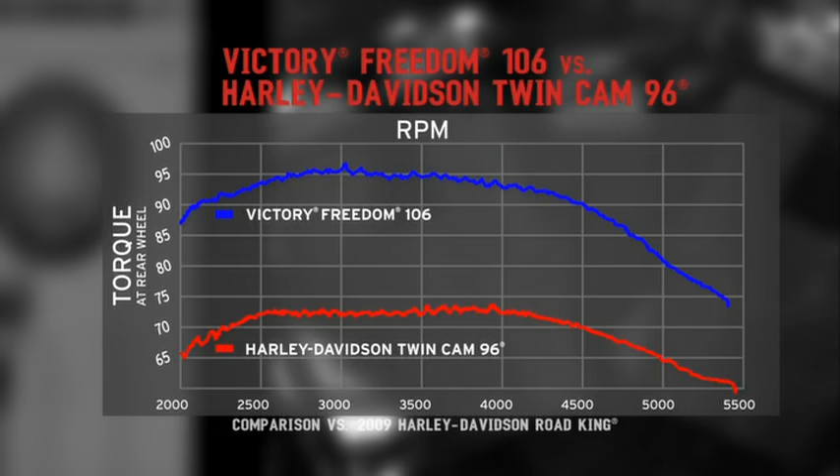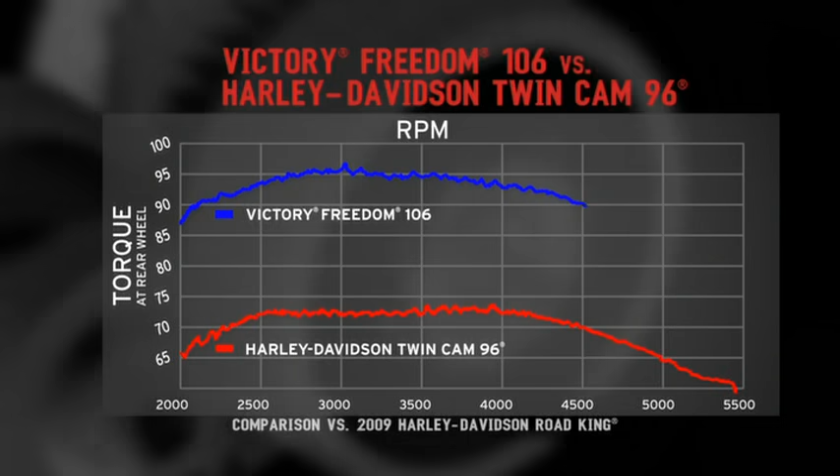These are rear-wheel performance curves recorded on our dyno here in Wyoming. Most large V-twin engines are able to provide high torque just off idle, but the competitor's torque curve dives sharply after that initial peak value, whereas with the Freedom engine, you'll notice it continues strong throughout the mid-range and keeps going into the higher RPM range.

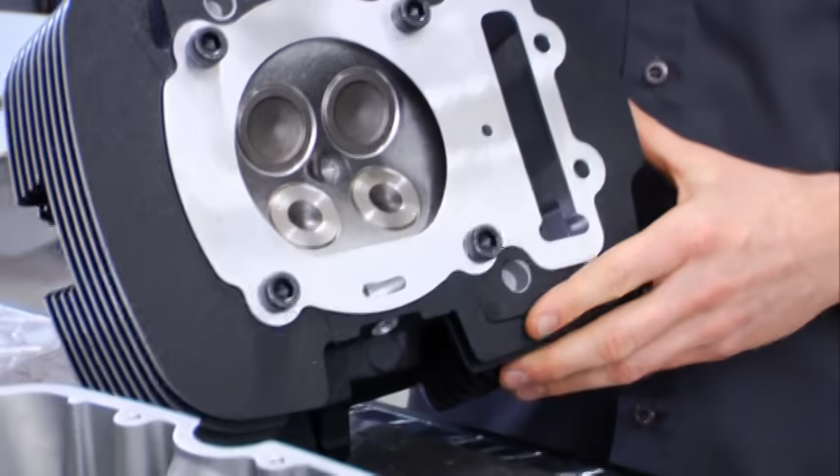To make more power, you've got to pack more air into the cylinder, and the four-valve design helps us do that in a couple of ways. Using two intake valves instead of one, we're better able to package the total valve area required to flow enough air to maintain this torque curve at high RPM.

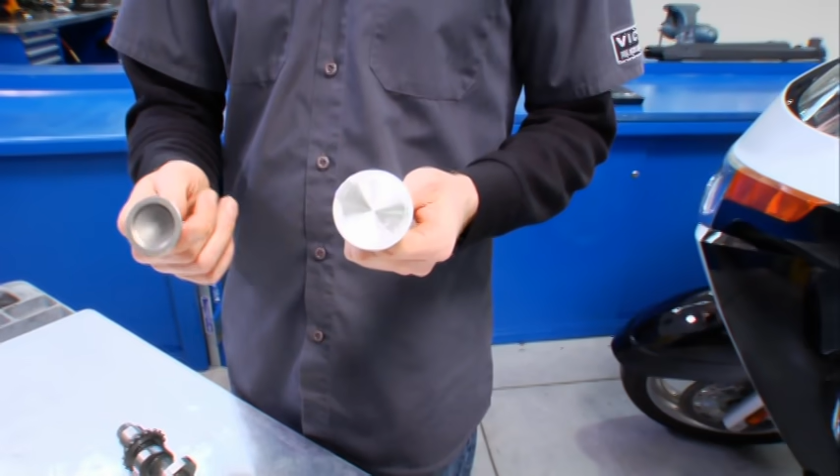To get more air into the engine, it's generally helpful to be able to open and close the valves as fast as possible. That's harder to do with a heavier valve. This is an intake valve from a competitor's two-valve engine design compared to the intake from the V106. You can see it's clearly a lot heavier.

You can see a very heavy multiple coil spring that's required to keep this valve under control, whereas the 106 only requires a single coil spring, much lighter.

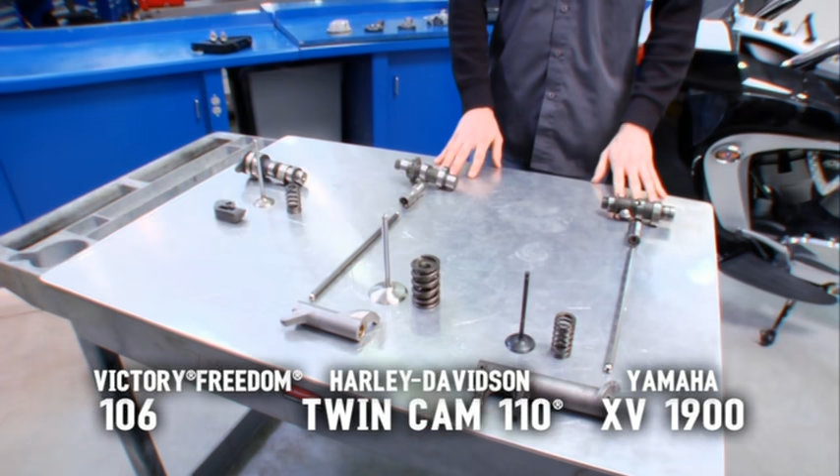Here we have three separate sets of components, two from competitors and one from the V106. You can see these are pushrod style competitors, also large V-twins. In one case, we have not only the heavy intake valve, but the mass of a heavy translating lifter, a pushrod, and a heavy steel rocker arm.

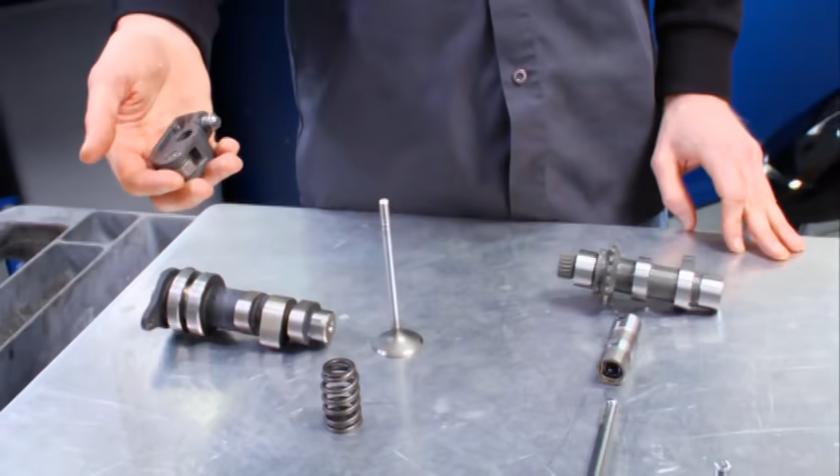By contrast, the only parts connecting the valve to the camshaft in the V106 engine is a lightweight cast aluminum rocker arm. The lightweight components with a stiff structure allow us to maintain good dynamic control, open the valve quickly, close it quickly, and produce this broad, flat torque curve that's so usable to the touring rider.

The engine's airbox also doubles as the vehicle frame. Sharing this duty allows us to have a large airbox volume, in this case 11 liters, which helps reduce intake restriction and eliminate peakiness of the torque curve.

Engine cooling requirements generally increase with maximum power, and we find that in our power class, adding a water cooling system with a radiator just isn't necessary. So why do it? You end up with a large, heavy part, hoses cluttering everything up, and increased maintenance requirements. So we've gone with an air and oil cooling scheme.

Carrying the power from the V106 engine to the rear wheel is our 6-speed transmission. We took our original 5-speed transmission and simply added a gear ratio to allow you to drop engine RPM at cruise. For example, at 70 miles an hour, shifting from 5th into 6th gear drops RPM by about 500. You actually get a reduction in inertial engine vibration of 30%.

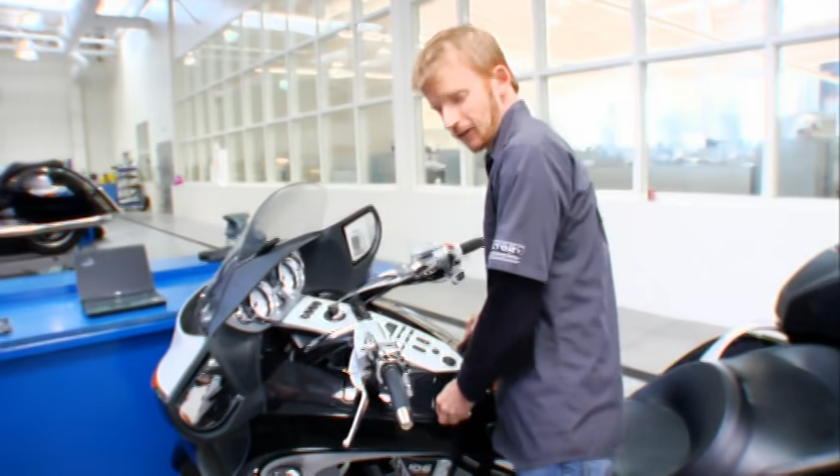I don't know if he wanted to show this or not. Right, that's me. All the engineers and technicians who worked on the project have our initials molded into the back of this body panel. We all signed it.